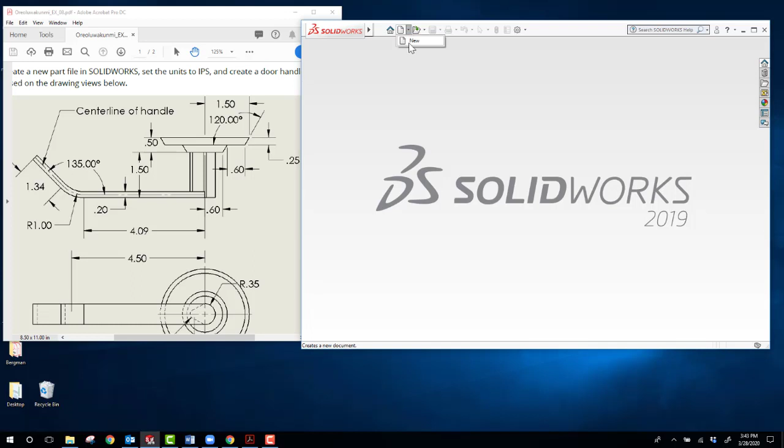Okay, since this isn't an assignment part, let me just walk you through the process of creating this part. So I am going to, since these are in inches, create myself a new part. I have a template here that's already set in inches, so I'm going to use that.

I'm going to assume that this bottom drawing is the front view, so this would be the top view of the part. So I'm going to create a new sketch on the top plane, and I'm first going to make this base part, using a revolve to make it.

So I'm going to create a center line, vertical, infinite length, and snap that to the origin. And then I'm going to use the line tool here, and I'll start here at this point.

I'm going to go out what would be 1.5, and I'll come in, and come over a little bit, and make another angle, and then come across, and then finish the shape.

So I'll just put some dimensions in here. This dimension is going to be 1.5, and this dimension here is going to be 0.6. This dimension here is also going to be 0.6. The total thickness of the part is going to be 0.5. And this distance here is going to be 0.25.

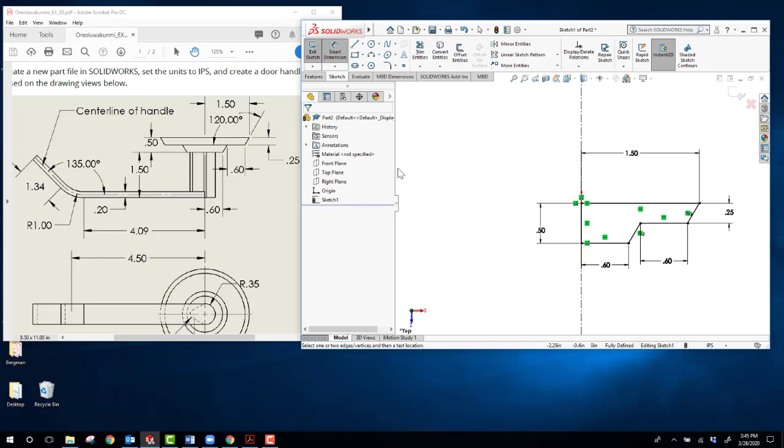I can use the smart dimension to verify that that angle is indeed 120 degrees. It's actually, if you notice, not 120 degrees, it's 120.96. So really this should be closer to 121 degrees if they were accurate.

So this is, for lack of a better term, a poorly dimensioned part. So I'm going to make that dimension driven just to show what that is.

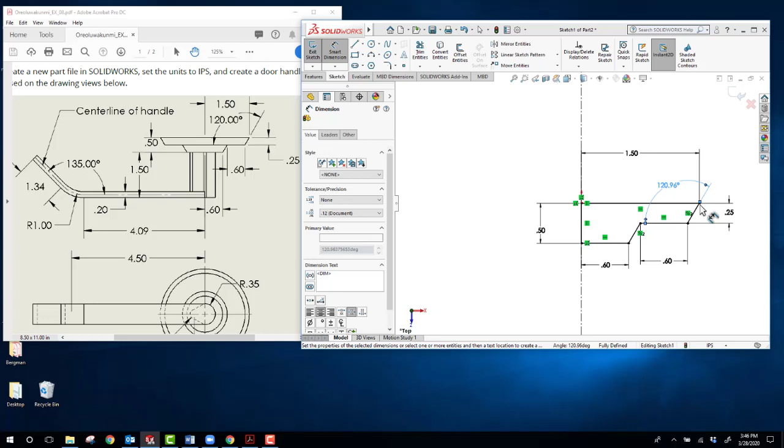And now I'll go ahead and use this as a revolve. So I'll go to Features, Revolved Boss Base, and since I had the center line there, it already assumed that's what I wanted, and it's doing a full 360, so I'll say OK with that.

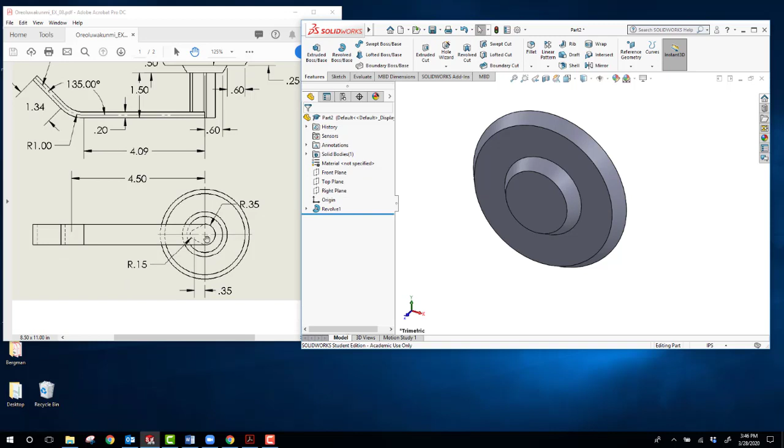All right, so now what I need to do is make this piece here. It's going to be a total height from here to its top of 1.5, and it's really made up of two circles with two tangents here, with this one defined about the center.

So I'm going to create a sketch right here, and make a first circle here. I'll make a second circle over here, and zoom in a little bit. I'll take the center point of this circle and the center point of this circle, make them horizontal to each other. I'll then go ahead and put my dimensions on.

So this will be its radius of 0.35, so it has a diameter of 0.7. And this has a radius of 0.15, so a diameter of 0.3. The separation between their centers, which is here and here, is to be 0.35.

And all I need to do to finish the shape is put on two tangent lines. So I'll select my line tool, touch that circle, and come across, and you notice I have the two relations showing up, the coincident and the tangent relation. So if I select that, it should make both of them.

So now we'll do the same thing on the other side. Again, coming close to this circle, that just puts a coincident on, and then if I come across this circle and move it slightly until I see both the coincident and the tangent relations. I'll double click that - oh, I double clicked and ended it by accident. Now I'll double click. All right, so that gives me my initial shape.

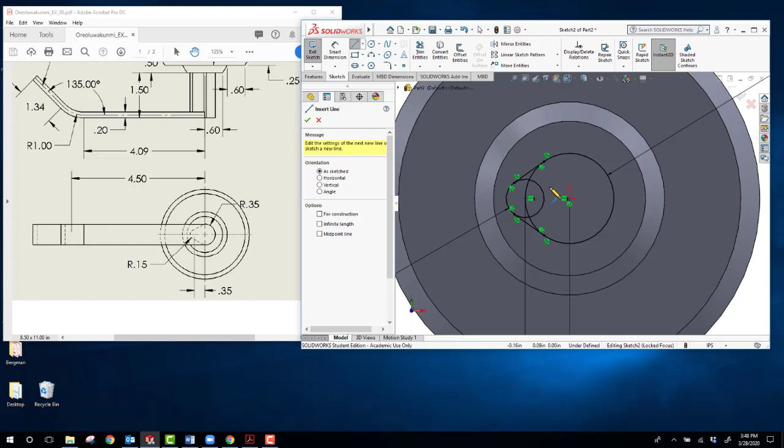I don't need to trim anything out. I mean, I can if I want to, but I'm not going to. So I'm just going to go Features, Extruded Boss.

A quick trick for this, instead of having to select all the inner materials, if I select that circle and that circle, that'll select all of that material, and then I just have to go in and make sure I grab these two little pieces that form the tangent edges. And this needs to come out to a total distance of 1.5 inches.

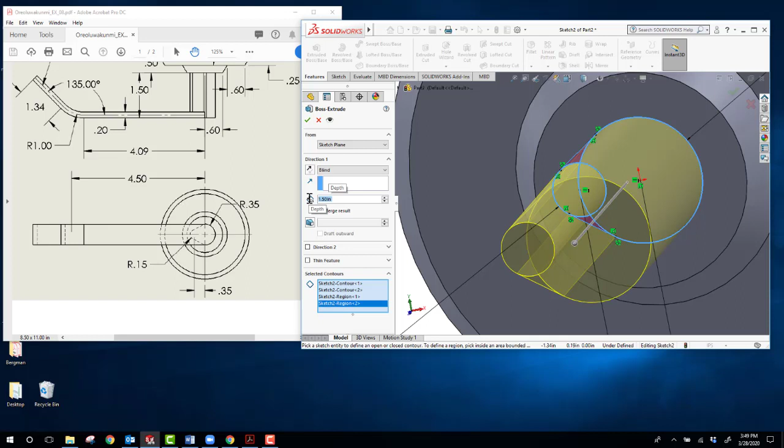Okay, so now the last thing that we need to do is this rectangular sweep. And that's exactly what it is, a sweep. I haven't gone over that in class, but it's a relatively straightforward application.

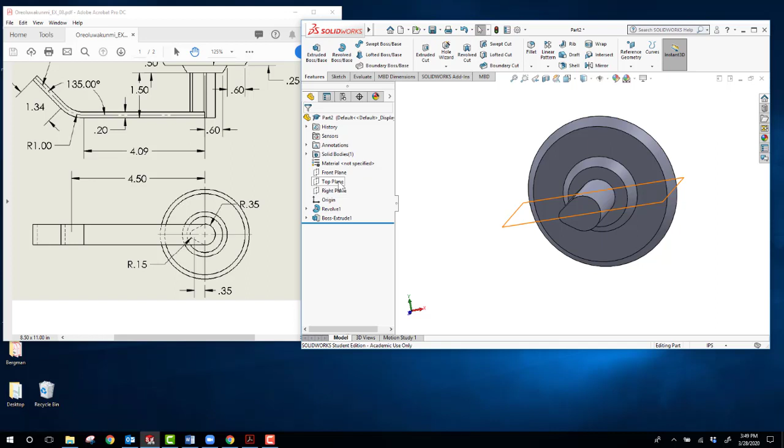So let's go here, and I need to use the plane that's running through the center. So I'm going to select the top plane, create a new sketch on that, and notice where the center line, the center point is. I'm actually going to take advantage of that, and just draw a center line coming down and all the way down to the bottom.

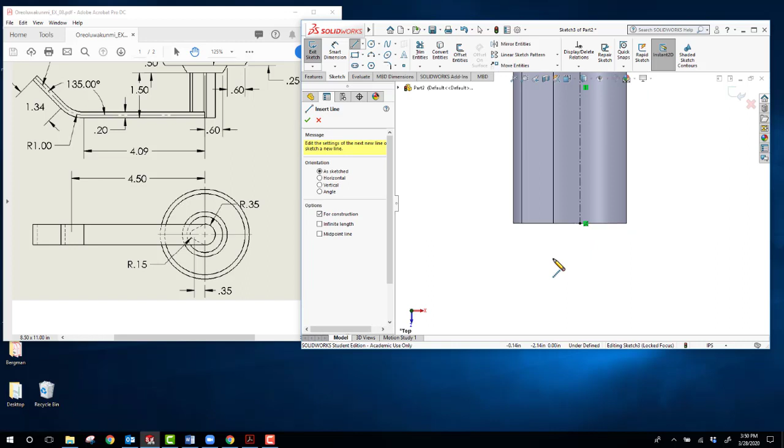Because I want that - I'm not going to be from the center here, I'm going to be right from the center of, how would you say it, that circle. Okay, so let me go back, select the sketch here to go normal to it again. And now what I need is to draw the line in.

So I think this line is a little bit, if I remember now, yeah, you got a 4.09 and then this 1.3, the other straight point, and then the 135 degrees. So there's a little weirdness going on here. So let me just go ahead and do it. I think this 4.5 dimension is redundant, if I remember correctly, or it might be the 4.5 is to the center of this circle. So let's take a look.

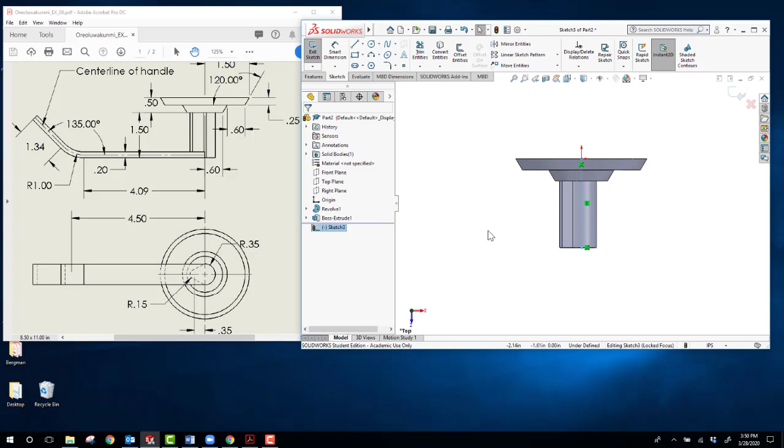I kind of forget how this part was made. So let's try that. I'm going to create a line from here, and I'll go out and I'll make that dimension 4.09.

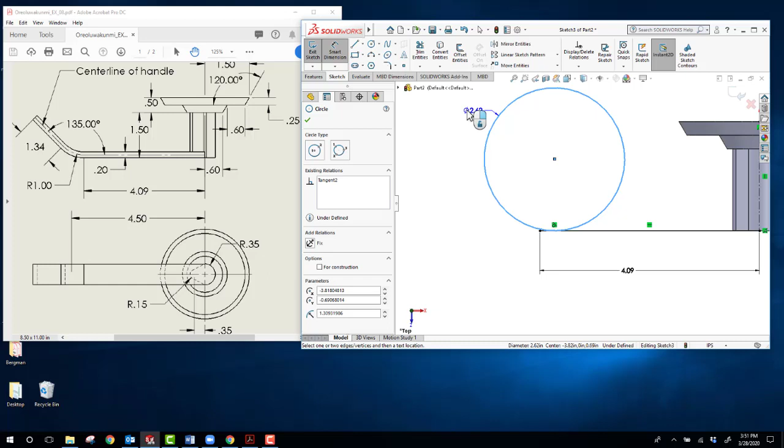Okay, so now what I'm going to try to do, again, as I said, I'm not 100% sure how this is exactly made, so let me go ahead and I'm going to create a circle here that's going to have a diameter of 2, but it's also going to be tangent to the circle here. So let me just draw it down. Okay, now I'm going to put the radius, or in this case the diameter, on of 2.

And what I'm going to do is make this distance to be the 4.5. So I'm going to go smart dimension from here to here and make that 4.5.

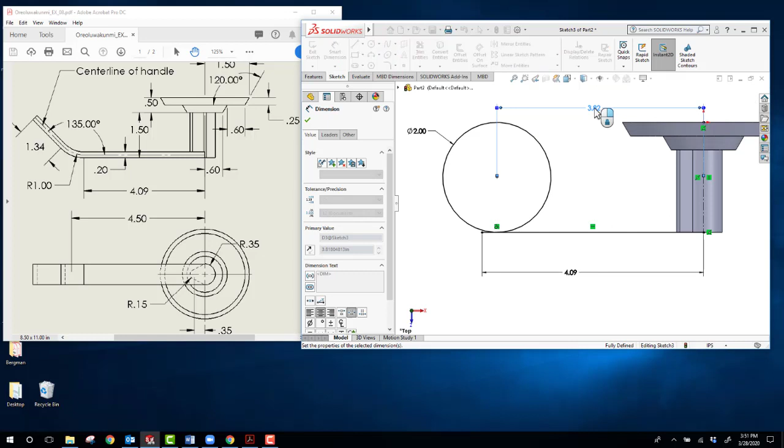Yeah, so I'm not 100% sure. You see, I was expecting that this would be automatically tangent to it, if you see the way the drawing is over here. So it's not quite, but there's something wrong with the drawing. So let's leave it like this, and I'll show you what I'm going to do next.

So I'll make another line here, and I'll bring it down to the circle and make sure that I'm tangent to it. And we'll make the dimension of that line 1.34. And then what I want to do is put the angle in between this one and that line and make that 135 degrees.

So we got everything except for the fact that I would prefer if this line actually came all the way over. So I'm just going to move this. I'll just put a secondary line in. I could just take this dimension off and move it over, but actually, let me do that. I'm kind of curious to see what happens over here.

So if I take this dimension off and I just drag this point over, right, so I'm right there, and as it happens, it's going to be right underneath, because if I put my dimension on here now, it's the same 4.5 dimension. So I don't know where this 4.09 dimension is supposed to be coming from.

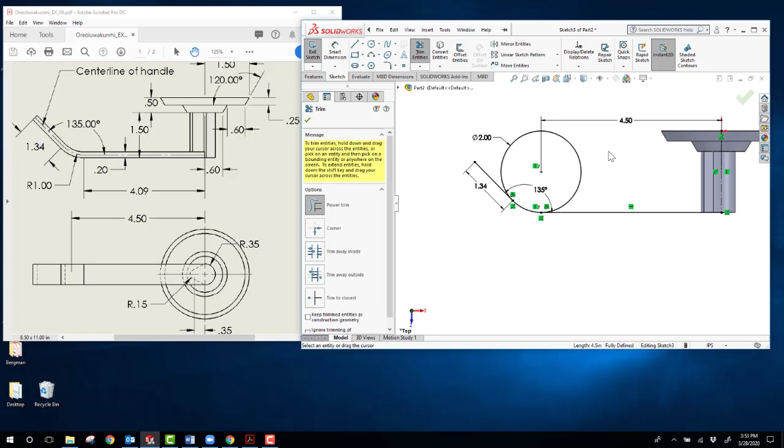So I don't know. All right, so now, but since this is going to be the path for the sweep of this rectangular piece, I am going to trim this part out. So I'll go ahead with trim entities, and I'll just do a trim there. And I can move that down, clean it up a little bit. Same thing here. All right, so that's all I need.

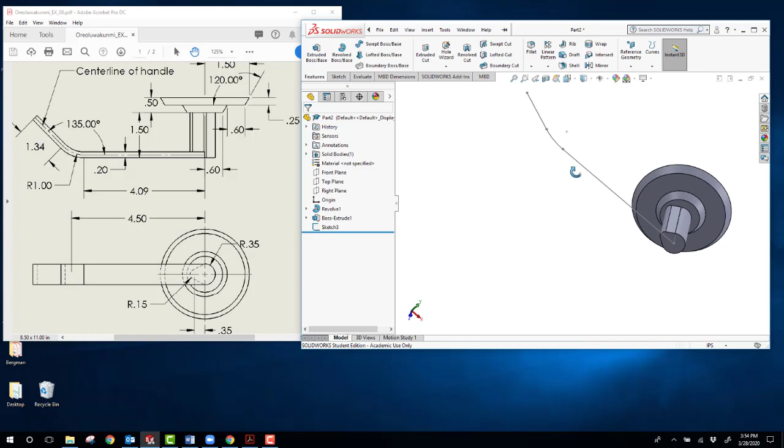That is going to be the sketch of the path that I'm going to use. So I'll just say I'm done now. And then the next thing I need to do is create a sketch on this plane, which would be the right plane. So let me go ahead and create that sketch. And that sketch is going to be along here. So what I'll do is I will go from this point down to here.

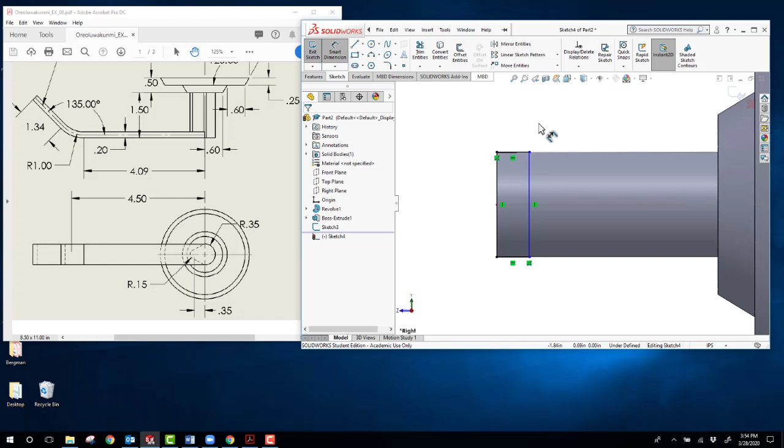And the thickness there is, where did they put it for us? 0.2. So the distance here is going to be 0.2. So I'm going to go ahead with Smart Dimension, and we'll make that distance 0.2. And that's all I need for that sketch.

So I have the profile of the path and profile of the sketch. So now that I have these two sketches done, I can go up to Insert and Features, and it will be a swept boss.

Where is the swept boss? Sweep, here it is. And now that's a surface, I don't want that. Boss base, that's where it is, sweep. So we're gonna do the sweep, and this is the profile.

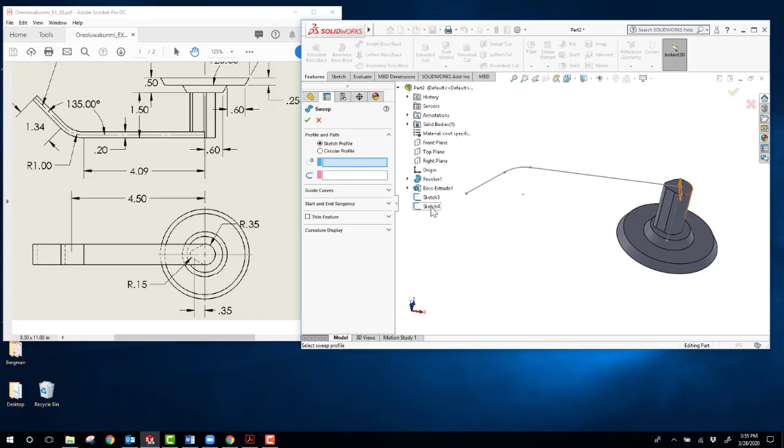So I'll select the profile. You can do it two different ways. I could come over here and select the profile, or I can come over here and select the sketch that forms the profile. Same thing for the path. I can click this, and that will show me what the sketch is going to look like. So I'll say OK. And that's the way the part should look.

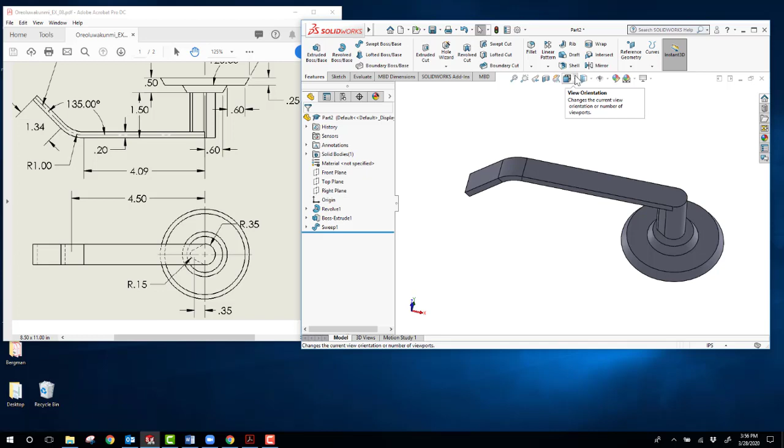So if I do a top view, and if I do my front view, actually, sorry, this is the front view, right? This is my front view. And if I do my top view, that's the way the part should look.

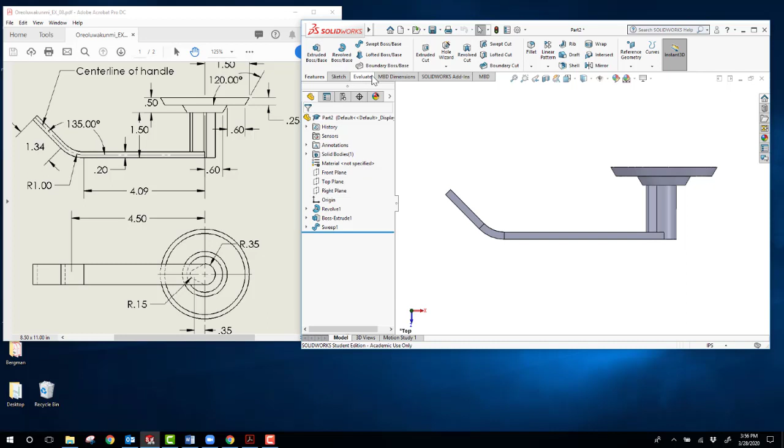Now I think I know where the 4.09 is going to come in from, because all these dimensions that I use, the 4.5 and the radius, are all going to the center line. So I bet you now if I go to Evaluate and measure, and I measure from this line to that line, nope, that's 4.5. So I don't know where they get that 4.09.

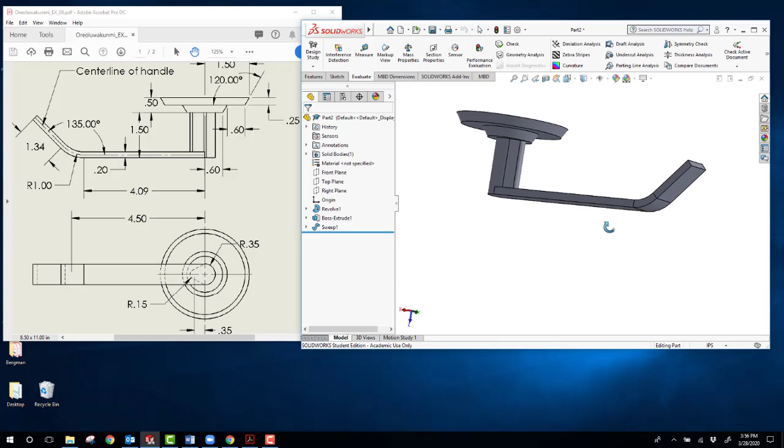All right, so that's how that part is created. Hopefully this has worked for you. And I don't know if they gave us a surface or anything to check this part about. They just say it should look like that below, but I don't think they give a volume or anything like that. Okay, so hopefully that works for you.